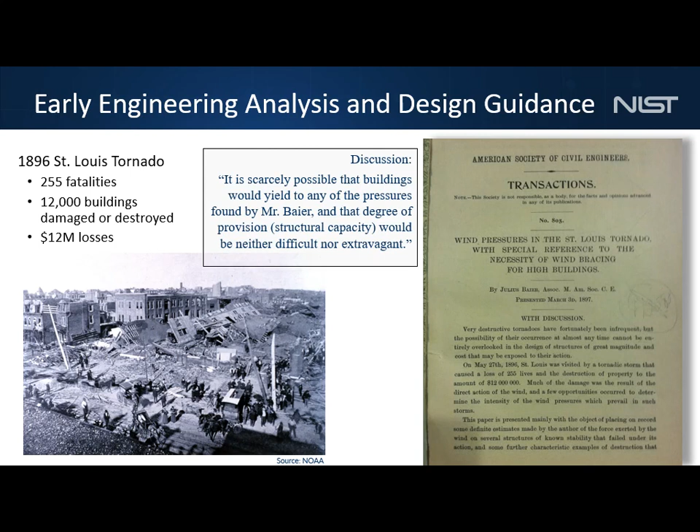We'll find out the same way: really, once you get above 3 or 4 stories, with the structural loads, we're not going to see collapses of those—we're going to lose cladding and things like that. But by the time you have a robust enough structure that's already going to be several stories tall, you've got the bones there that you need to be able to resist a tornado.

So how rare are tornadoes? The first chart we look at goes back to 1950 with our official records. We see, oh my gosh, what's that, climate change or something? We've got a few tornadoes in the early years, and later on, no—we didn't start out recording those tornadoes. The early years of the database were built by looking at newspaper records and other local records, etc. We didn't have that, and we didn't start recording tornadoes as a scientific field of study until much later.

Only when we get to the early 90s did we start to install the Doppler radar network across the U.S. Once we get past the early 90s, we can see that the number of tornadoes—there's a lot of year-to-year variability, but the number is relatively constant on average, something like 1,250. That's the number of reported tornadoes per year.

A large number of tornadoes go unreported, because where do you get reports from? The radars themselves typically don't catch the tornado. They might catch a rotation that indicates a possible tornado if it's close enough and on the ground, but unless the tornado happens to go right over the radar station or within a couple miles, it's not measuring any wind speeds or anything. So we have a possible indication, and until you go out and verify from the damage that you see, that's how a tornado gets reported.

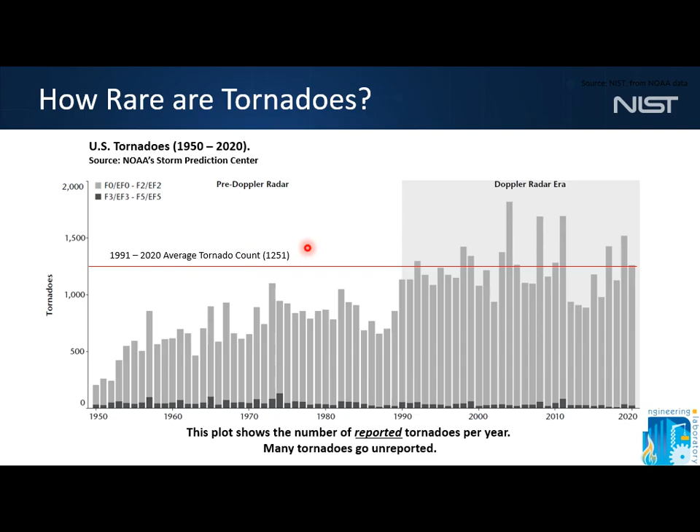Where did tornadoes occur? Tornadoes occur in all 50 states. They occur on all the continents—I don't know that there's been any recorded in Antarctica, but of course there's not much population down there to see them. The overwhelming majority occur east of the Rockies.

You might think, wait a minute, they don't get many tornadoes on the East Coast—sure we do. I'm in Maryland. We had one about a half mile from my house, an EF1, in June last year. We've had EF4s in Maryland and other intense ones.

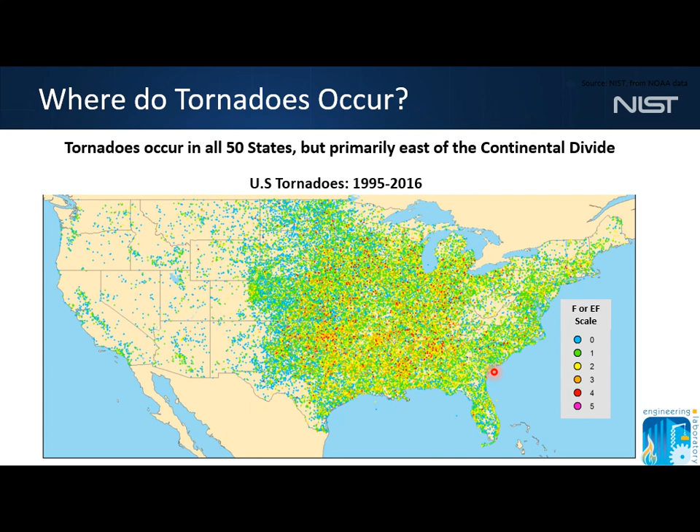We see more of the darker colors with the more intense tornadoes in the central U.S., over to the southeast, but we see some of these darker dots even over here in the east. We see a lot along the coast—hurricanes can spawn sometimes dozens, or a couple of dozen tornadoes off an individual hurricane, usually on the advancing right front quadrant, sometimes a state or two ahead of the hurricane.

If we think more about local impacts, as part of some work we were doing earlier, we went back mining a lot of different records over the last 30 or so years. These are just the schools we know about that have been verified as hit by tornadoes.

When you think about adopting your codes—with the 2018 IBC, did you keep the requirements for tornado shelters in schools? Does anybody require ICC 500 tornado shelters in schools? Nobody's raising their hand—I guess you might be one of the communities that amended that out. Some communities have amended out the storm shelter requirements. We put this work together to help communities understand their risk, so maybe when you adopt the later code, you should think about not doing that.

Some schools—we have one over here in Orrick, a school hit twice, and one over here in Gillespie, I can't quite read that. A couple of schools have been hit twice. How rare are tornadoes? A couple of the same schools just in these two states got hit twice in the last 30 years. Tornadoes are not really rare at all.

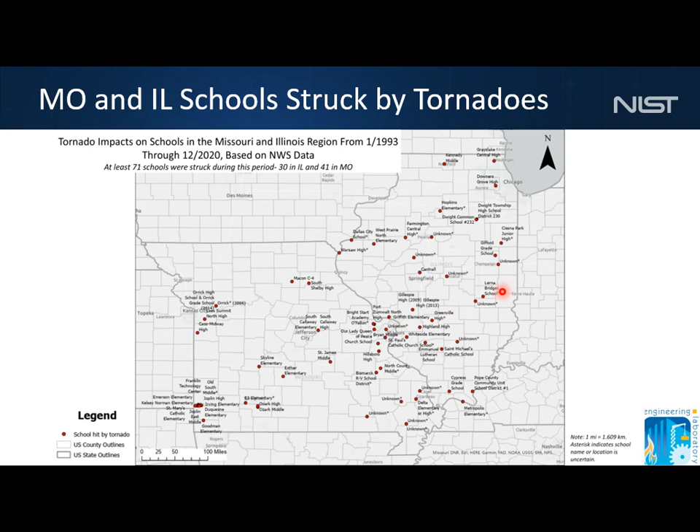How many lives are lost in tornadoes? Tornadoes kill more people per year in the U.S. than hurricanes and earthquakes combined. Tornado fatalities are a buildings problem—85% of all tornado fatalities occur inside of buildings.

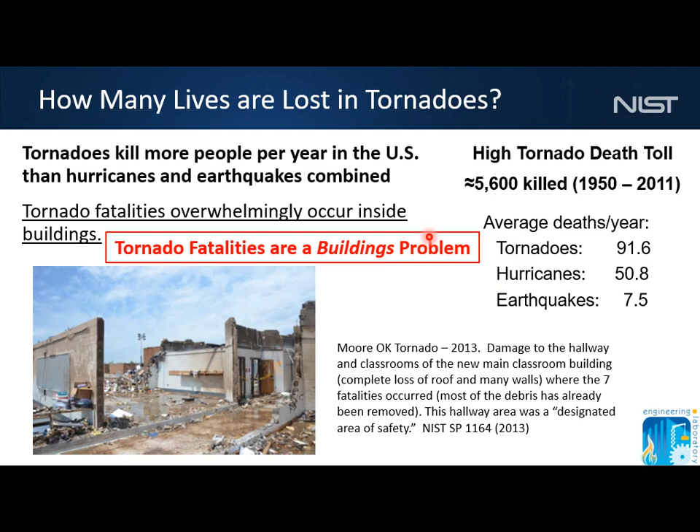We can design for Mother Nature's worst. Storm shelters provide life safety protection. FEMA uses the term safe room—their FEMA safe room requirements are nearly identical to ICC 500 storm shelters. In the center part of the country, like here, we're designing for 250 mile per hour winds, impact of a 15-pound 2x4 traveling at 100 miles per hour.

There have been no reported failures of ICC 500 storm shelters or FEMA safe rooms. This gets investigated—when there's a storm, FEMA has a huge database of all the shelters they've funded. They'll overlay that and look at any media reports of storm shelters or safe rooms that have been hit, and someone from our community will go out and investigate. We're proud to say a large number of residential safe rooms have been hit by even EF4s and 5s, and none have been significantly damaged with no injuries. There's also been a smaller number of community safe rooms and shelters hit.

How much damage do tornadoes cause? According to the Insurance Information Institute, catastrophe losses—events with over $25 million in covered losses—including tornadoes account for 40%. Hurricanes and tropical storms account for 38%. It's not a perfect statistic; the way they keep it, hail gets mixed in, so a lot of this is hail and other windstorms, but tornadoes are a big chunk of this percentage. Anyway, it's certain that tornadoes cause a huge percentage of our insured losses.

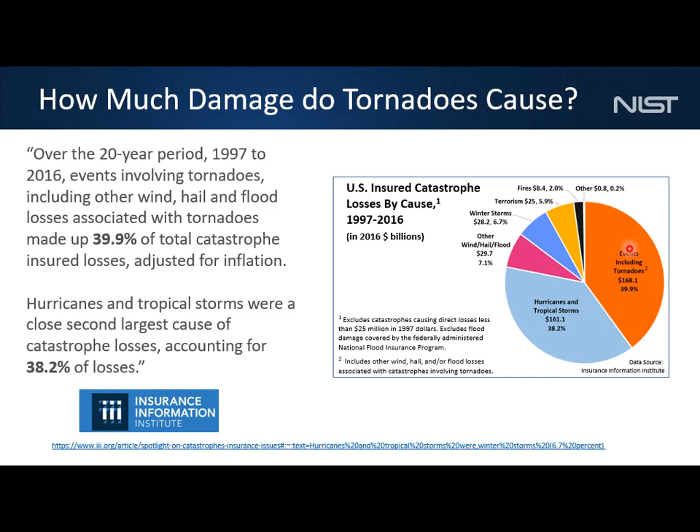The other thing that happens is a lot of the smaller tornadoes just aren't going to reach the 25 million threshold because it only hit 5, 8, or 20 buildings. So a bunch of the tornado data wouldn't be caught here because many smaller events don't qualify, whereas a hurricane or tropical storm making landfall, even a modest one, is going to exceed 25 million and be included. So there are a few different warts with this data, but that's what's available.

Isn't most of the damage caused by the big tornadoes? Let's take a minute to look at this plot. It's a little busy. First, look at the black line - this is the total loss, the average loss per tornado in millions of dollars, for EF0, our weakest tornadoes, up to EF5, our strongest. This is on a log scale, and we can see it goes up almost an order of magnitude with each increasing intensity.

But if we look at the total losses across all the EF0s, that's in red. Take all the EF1s in the database, all the EF2s - except EF0s, where wind speeds are down to 60 or 70, we're just ripping gutters off and getting trees falling. We shouldn't see major structural damage at the EF0 level, but once we get to EF1, we start to pick up that damage. So how do EF1s cause almost as much damage as 2s, 3s, and 4s? Well, that's because there are a couple hundred of these, versus less than one EF5 per year.

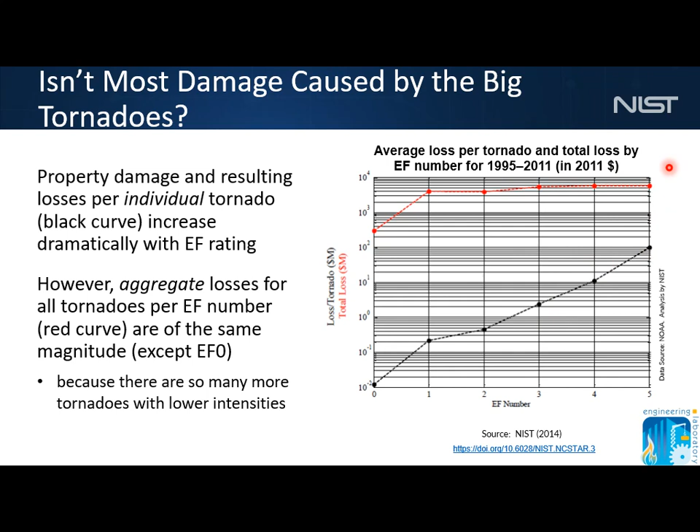We actually haven't had an EF5 in like a decade or so. That's what happens - yes, these are more intense, the intensity of damage is much greater, like the Joplin tornado, but these are much, much less frequent.

So here's our opportunity for tornado loss reduction. We don't have to design everything to withstand the most violent tornado - that's what people think. 'You have to design for tornado, I've got to design for the EF5.' Well, why? Do we design for a Category 5 hurricane hitting New York City?

No. We do design for Category 5 wind speeds in Miami, because that's more likely. Hurricanes go up the coast - we can get Hurricane Sandy, or Superstorm Sandy, in New York, but they're just less frequent. So the idea - there was a big hurdle to overcome to realize we could do the same thing for tornadoes. Let's design for the common tornado, the garden variety tornado, like we do everything else.

And it turns out there's a reliability basis for that. Violent tornadoes are uncommon - the vast majority are much smaller. We have EF0 and EF1, and here are the wind speeds: EF0 is 65 to 85, EF1 is 86 to 110. That 110 or so is around your design wind speeds here, depending on risk category - 110, 115, 120. So we can design for it.

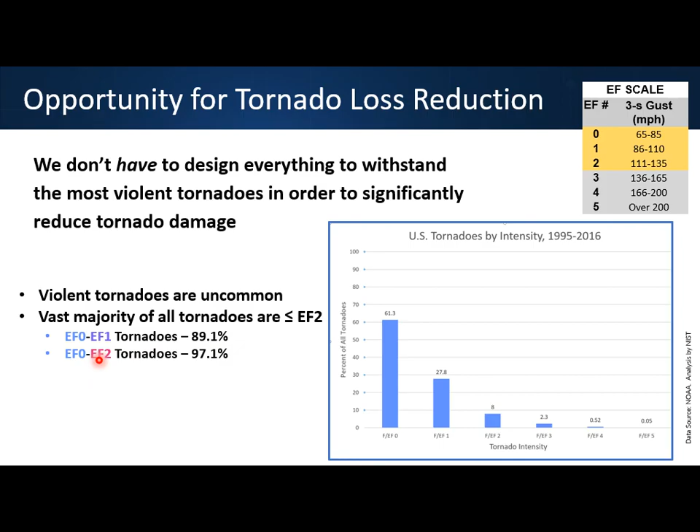It's not exactly equivalent - tornadoes, for the same wind speed, create higher loads for a few reasons we'll get into today. But these are things we design for all the time. In Florida we design for 200 miles per hour, South Louisiana we design for 200 miles per hour. There's certainly things we can design for. Most tornadoes - almost 90% are EF1 or below, even including EF2 or less at 135 or less - 97% of all tornadoes.

And not just that - even in those other charts I showed with the damage, this plot is from our analysis of the Joplin tornado. There are probably some smaller pockets of EF5 in here as well, but if we look at it, most of the wind swath of the whole tornado doesn't have EF3, 4, or 5 speeds, even if it's rated an EF3, 4, or 5 tornado. Those are small pockets with the highest wind speed - most of the swath is covered by EF0, 1, and 2 wind speeds. In this case, 72% of the whole track area impacted had EF0 through EF2 wind speeds. So we can design for a lot of parts of the tornado.

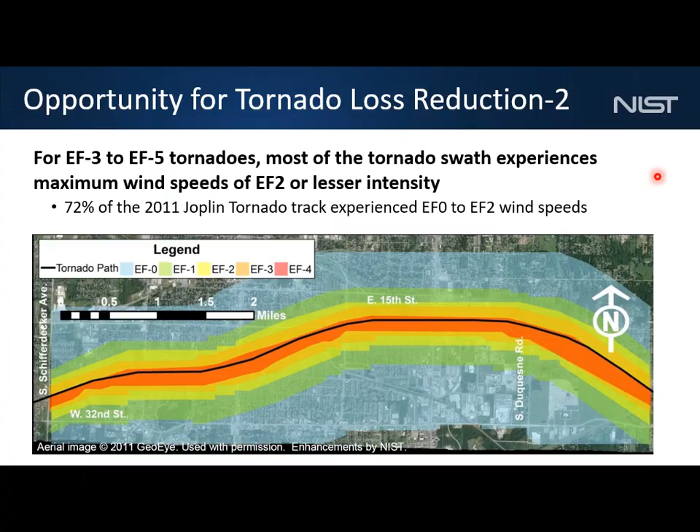So we need a paradigm shift here, ignoring the tornado hazards in design of our built environment is not an appropriate response. So the genesis of the tornado loads I'm going to talk to you about today was our NIST technical investigation of the Joplin tornado in 2011.

This was conducted under NIST's NCST authority, National Construction Safety Team. That authority was given to NIST after the World Trade Center disaster, when it was like, which agency has the authority to investigate this? The National Transportation Safety Board is called in if there's a plane crash or a train derailment, but there was nothing similar, so Congress created something similar, didn't give us any budget for it, but told us to go out and do that. NIST has a long history of doing disaster and failure studies, but that was a new additional authority they gave us.

Our study of the Joplin tornado was our first real tornado study. It was the most comprehensive study of a single tornado that's ever been done, including looking at the meteorology, the storm characteristics, the building performance, emergency communications, human behavior, and fatalities—all 161 fatalities. We know where they occurred, what the people were doing when they happened, cadaver reports, all sorts of things like that. From understanding all that, we developed a series of 16 recommendations for improving tornado hazard characterization, design and construction of buildings and shelters, and emergency communications.

When we conduct a technical investigation under NCST, we are on the hook to implement the recommendations. We have to write to Congress every single year about what work we did to get these recommendations implemented. From the World Trade Center disaster, we finished our implementation last year with the publication through ASCE of a new standard to prevent progressive collapse, disproportionate collapse. So some of these things, we might have to do a lot of R&D first, then we have to work with the standards and codes communities, et cetera.

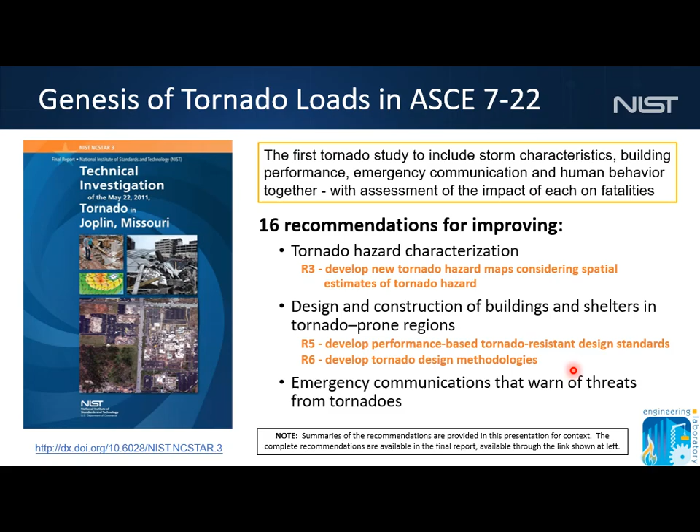So one of the things we're really going to focus on today is development of tornado hazard maps, development of tornado design methodologies, and performance-based tornado-resistant design standards.

One of the key things we need to understand that's different about tornadoes than just about every other hazard is the size of the building you're dealing with is critically important to your risk. I don't care how many square feet the building is, I care about the plan aspect area—what's the footprint of the building, and to some extent the shape. So tornado risk is a function of the building facility size and shape.

Tornado strike probabilities increase with increasing plan area of the building or structure—or maybe we call it a target. What that also means is if you fix the return period—50 years, 100 years, 1,000 years, 10,000 years, whatever you're looking at—for a fixed return period, the wind speed you have to design for increases very significantly with the target size. Think about it: is a tornado more likely to hit any one little house, or a warehouse that has 100,000 or half a million square feet? The tornado in some places was almost a mile wide, but it's much more likely to hit a really big target than a small target.

We talk about the development of our tornado hazard maps—these are in our ASCE 7 standard. For risk category 3, it's 1,700 years, the same return period we use for straight line winds. If we have a small facility, 10,000 square foot plan area, the tornado speeds we have to design for are pretty modest and don't cover much of the country. If we go up to a 1,000,000 square foot facility, we're going to cover almost everything except New England, and most everything except the West Coast and west of the Rockies, with some pretty significant speeds, especially in the middle of the country.

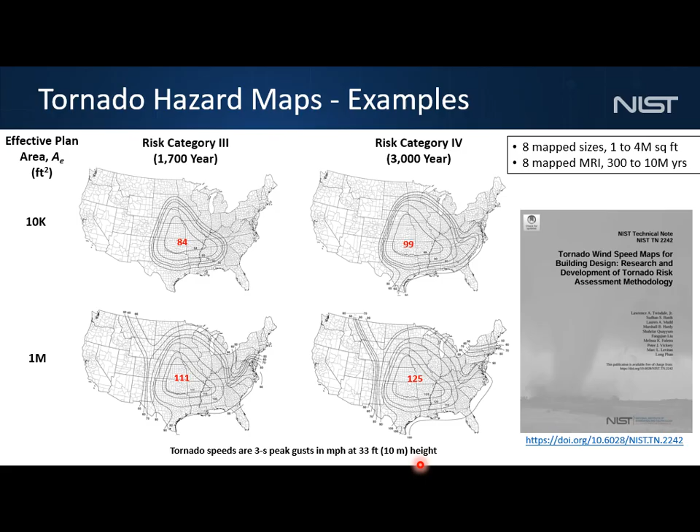Our facilities are 40 million square feet for LNG facilities, so they can go up to that size, some of these big facilities on the coast. That's something we're hoping to produce larger maps for. We have short return periods all the way up to, again, what the Nuclear Regulatory Commission was interested in: very long return periods, 10 to the 6th, 10 to the 7th kind of things.

One of the really important things, and a lot of the new research we did, is that all of the tornado load provisions are based on a decade of research, much of it conducted by NIST, but also gleaned from the literature and other researchers and collaborators.

The key thing is tornadic winds are very different from straight line winds. We have a different climatology, which we talked about with the maps. They're very short duration, with rapidly changing speeds and directions. They have strong updrafts right near the ground, and a decreasing speed with height above the ground instead of increasing speed, so the profile is totally different. We also have to worry about atmospheric pressure change, and much more intense windborne debris.

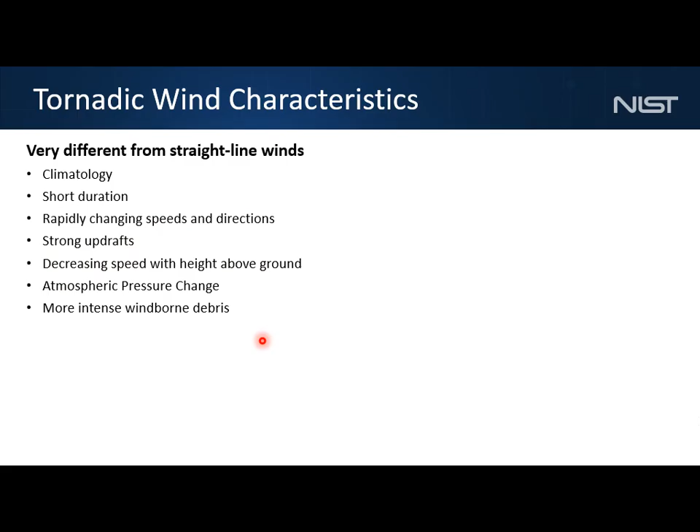Just as an example, we don't have time to go through all the research, but for this one in particular, to look at the velocity profiles of the horizontal winds, we worked closely with the mobile radar community, the Doppler on Wheels, the real chasers, the science chasers, not the tourist chasers.

Out of all the hundreds of records they've collected over the past few decades, they had a few dozen tornadoes where they measured wind speeds near the ground, usually limited by curvature of the earth, elevation beam angle requirements, distance away from the tornado, etc. Usually, even when measuring the tornado, they're up a thousand or thousands of feet in the air.

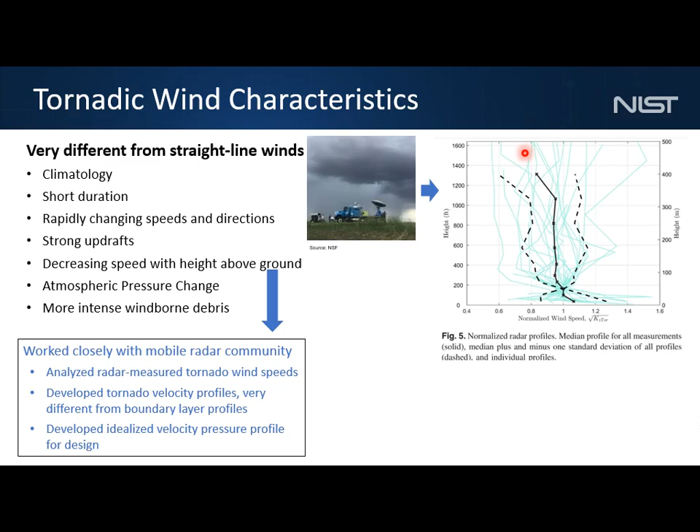But there are very few records with data near the ground, and there's a ton of scatter here. This is like a normalized velocity profile versus height, our normalized wind speed, and we see there's a lot of scatter. But if we look at the median profile, it looks pretty uniform, and actually increases a little bit near the ground. That's what this dark line in the middle is, the median profile.

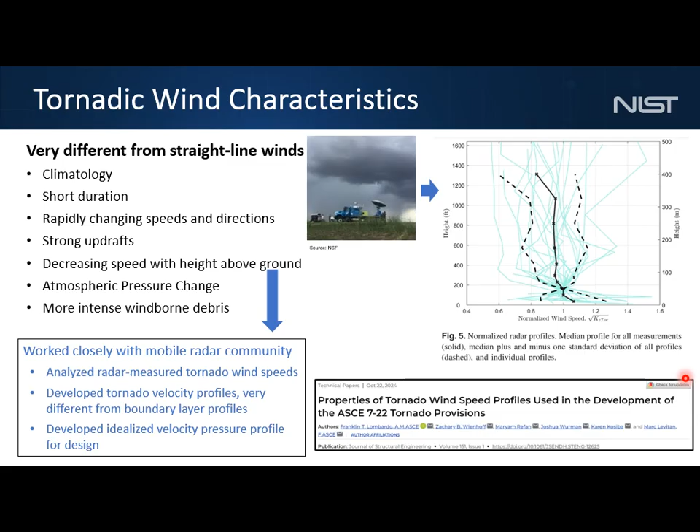What happens is the air rushes in, right? It's this vortex. The air rushes in along the ground surface, turns the corner in what they call the corner flow region, and then moves up. So the highest horizontal wind speeds occur near the ground where the air is getting sucked in, totally different from our boundary layer wind. We recently published a paper on that development with some colleagues in the ASCE Structures Journal.

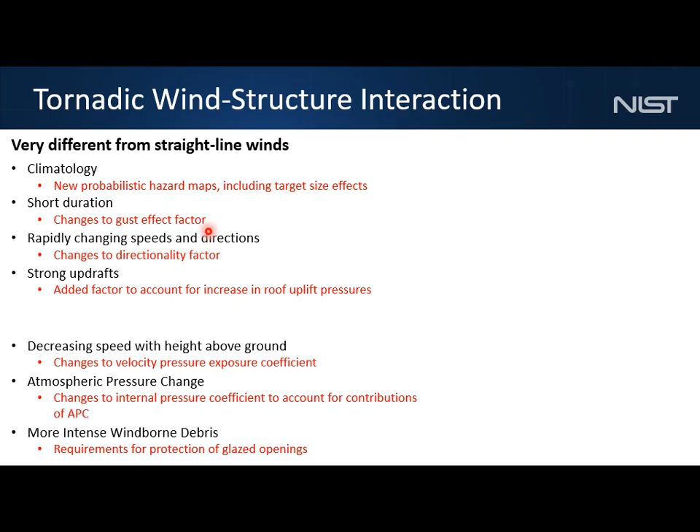So for all these different types of wind and characteristics, we had to make changes to our wind load design procedure. We have new probabilistic hazard maps, which we talked about. We made some changes to the gust effect factor, which we don't understand nearly as well as we should. And we made some changes to the directionality factor for the strong updrafts.

The tornado simulator testing wasn't as good as it is now, and we had to do this work 7 or 8 years ago at this point. We used a boundary layer wind tunnel, but we tipped the back of the model into the floor of the wind tunnel to simulate an increased angle of attack and a net updraft on the roof, which enhances our roof uplift coefficient.

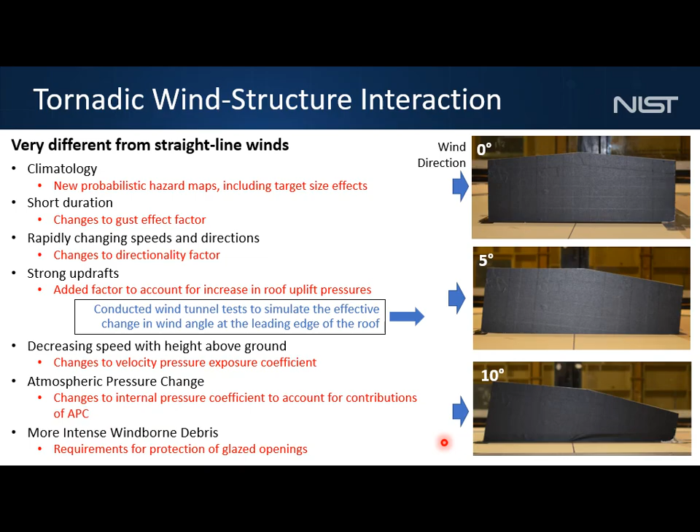Changes to our velocity pressure: we have atmospheric pressure change to worry about, and we have a more intense debris environment because of these updrafts, etc. It's much more intense than even a hurricane.

This kind of construction, this tall wall—whether it's precast, reinforced masonry, etc., with bar joists up on the roof—that connection, that roof is typically the only thing holding that wall up. There's not enough bracing laterally between the walls or foundation; they're not designed to be cantilevered. As soon as that roof starts to come up a little bit, you lose that top of the wall, and that wall's unstable now.

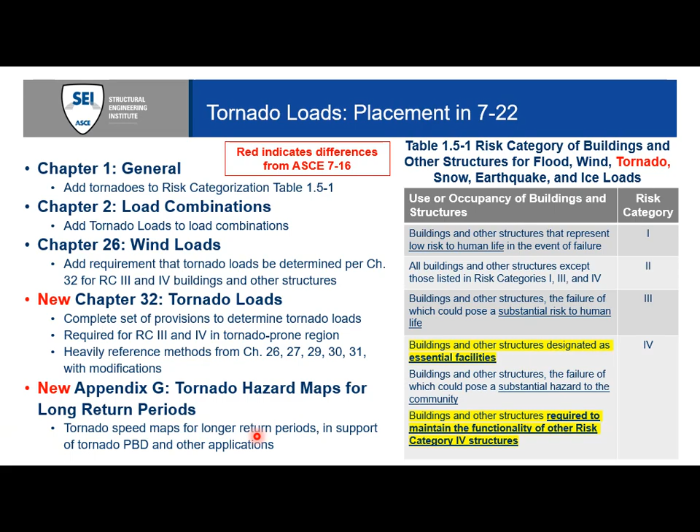We've made some changes to load combinations. We had very limited changes to wind loads, pretty much just removing the limitation that says don't do tornado. We have a brand new Chapter 32 on tornado loads, and a brand new appendix with long return period hazard maps for tornado loads, particularly for NRC and other users interested in much longer return periods.

As a reminder of our definition of essential facilities: these are buildings and structures intended to remain operational in the event of extreme environmental loading from flood, wind—we added tornado to that list. There's a bunch of other places in Chapter 1 where they listed a bunch of hazards, and tornadoes is now included on that list.

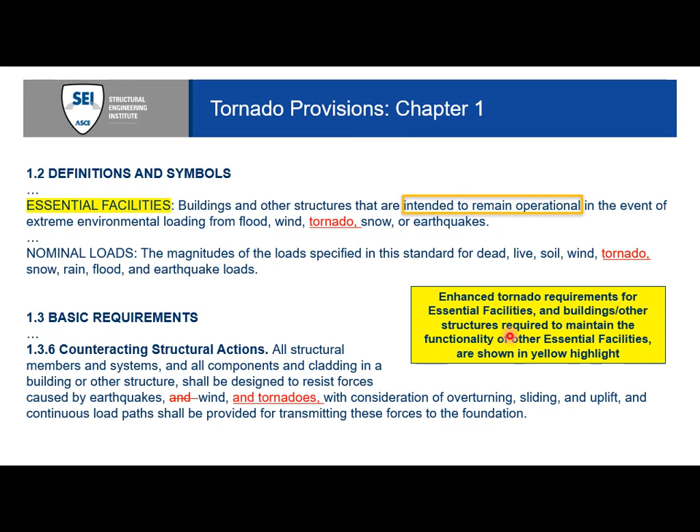A few other places in the presentation here I'm going to highlight. For essential facilities, we have some enhanced requirements for buildings to hopefully help maintain this functionality requirement.

In our load combinations, we had W used for wind load, we added W sub T for tornado load, determined in accordance with chapter 32. Tornado loads are not treated as a subset of wind, right? We have a chapter on flood loads, a chapter on tsunami. It's both water around the building, right? But they're very different. The nature of the hazards are different, those sorts of things. So we treat tornado loads totally separate.

However, when we go into the equations, in equation 4, the equations that deal with maximizing wind load, now we're going to substitute a W or a W sub T. So you have to calculate your tornado loads, you calculate your wind loads. When you go into the load combinations, then you see for each individual element that you're designing which one's controlled. If you remember, combinations 1 through 4 maximize our gravity loads, combination 5 maximizes uplift.

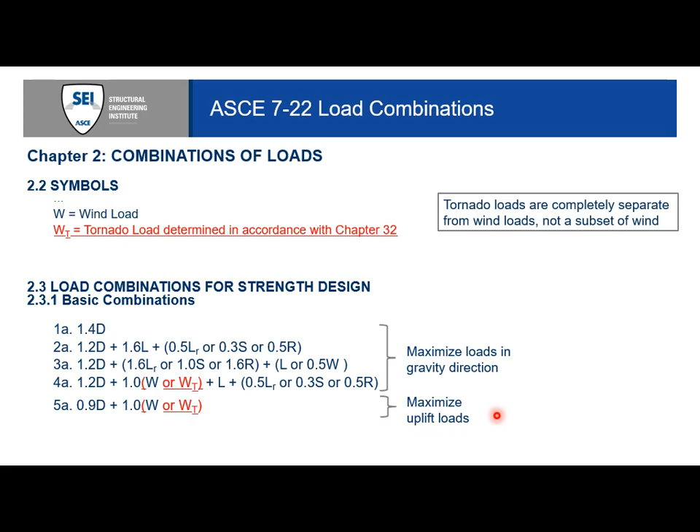So tornadoes are separate. Now notice here, on equation 3, we have a live load or 0.5 wind. Why isn't there a wind or tornado there? Well, because equation 3, we're maximizing something happening on the roof, right? Roof live or snow or rain. And this is our arbitrary point in time load. We don't have an arbitrary point in time tornado. I mean, it might be windy and there might be a little bit of wind blowing, so you might have a wind load, but you wouldn't have a W sub T there.

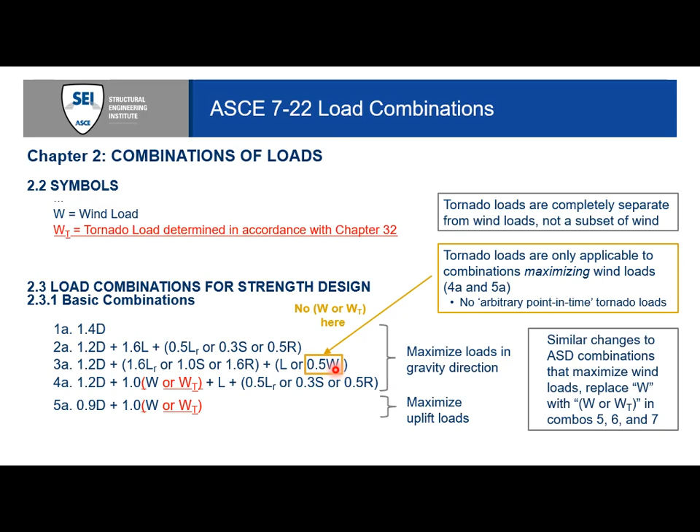And similar changes in the ASD combinations. We won't show those here for sake of time.

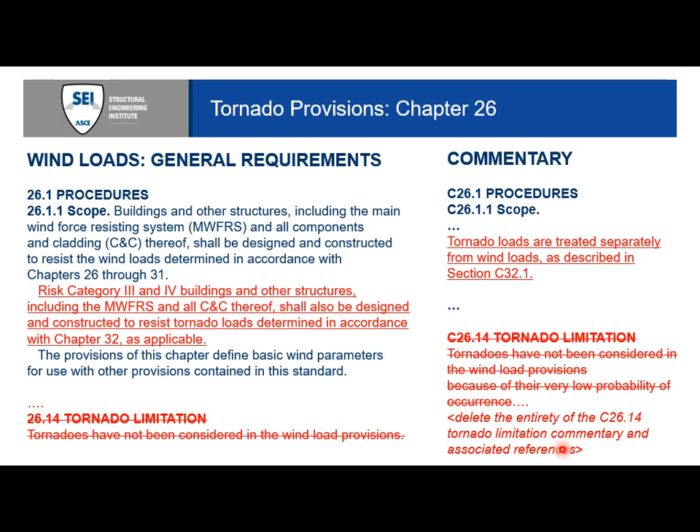In chapter 26, we just added one sentence to the scope of the chapter. Risk category 3 and 4 buildings and structures, including main wind force and components and cladding, shall be designed and constructed to resist tornado loads per chapter 32. And we just point in the commentary to chapter 32, and we've removed this whole section, half a dozen pages of commentary that we have on the tornado limitation.

Our chapter 32, we look at our scope. It starts out with a flow chart. And particularly the seismic folks on ASCE 7 fussed at us about this. Oh my gosh, wind's already complicated. Really, the seismic people complain about wind load being complicated. Here you've got to worry about both of those aspects. But they're saying, well, can't you give us some ideas when we don't have to do tornado loads? And so we came through and there's this flow chart. Tornado loads required: well, if it's not risk category 3 and 4, nope, you don't have to do it.

Are you in the tornado prone region? If you're not in the tornado prone region - what we showed on the map is basically east of the Rockies - nope, you don't have to design for tornadoes.

Then we looked at, is your tornado speed greater than 60? You get your tornado speed from the map. If you're less than 60, you can stop right there. Tornado load won't control. In our regular design wind speeds, even at the lowest ends, any place here they're 100, 110, whatever, by the time you get to risk category 3 and 4. And if the wind speed of the tornado is less than 60, just with our calculation procedures, it generally won't control anymore.

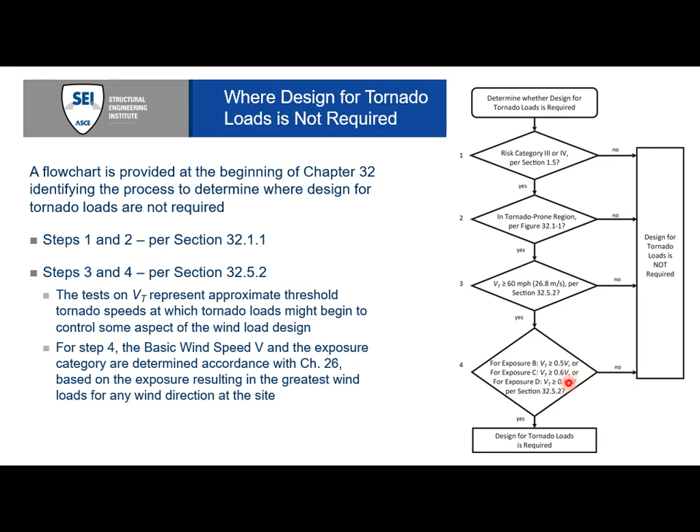Or if for different exposures your tornado speed V sub T is greater than some percentage of your basic wind speed. Now, as we'll see, we don't understand about surface roughness and exposure effects for tornadoes, but obviously it reduces your wind load. If you're in exposure B, you get 30% less wind load probably than in exposure C, depending on the height of your building. And so this is kind of how likely a tornado is to control over your wind speed. Well, if your tornado speed isn't greater than either half or 60% of your wind speed from B or C most of the time, then you can just stop right there. You don't have to do tornado.

One of the key things that we put in the tornado load chapter is this really big user note, like a caution that kind of says, wait a minute, this is brand new, folks. You need to understand some things. We have some pointers to commentary. Importantly, let me highlight some key elements here: the tornado loads specified in this chapter provide reasonable consistency with the reliability delivered by chapters 26 and 27, for regular main wind loads.

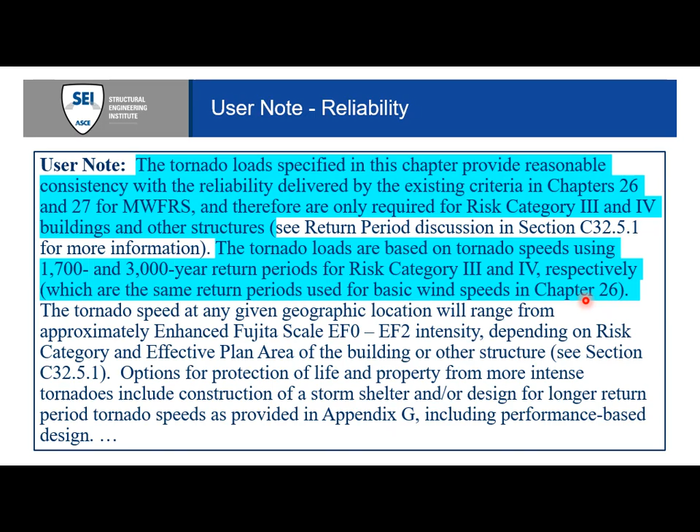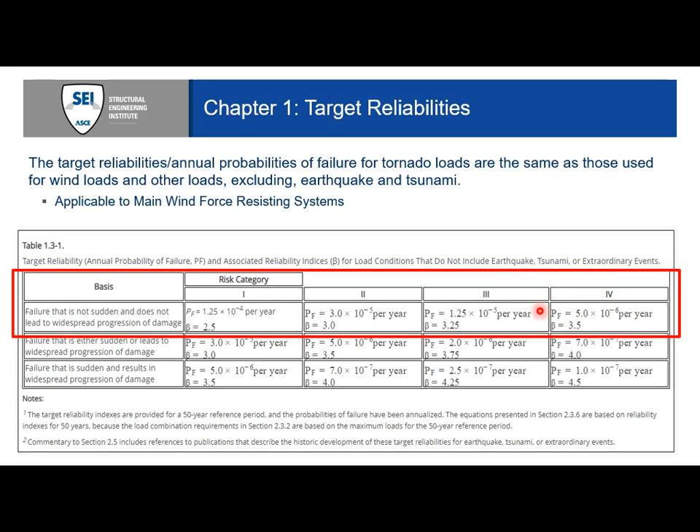They're only required for risk category 3 and 4 structures. The tornado loads are based on tornado speeds using the same return periods we use now. We have target reliabilities in chapter 1, and those target reliabilities for risk category 3 and 4 are the same for tornado as they are for straight line wind. So your probability of failure over the life of the building should be the same for risk category 3 and 4 as for the regular case. So what that means is we're designing for the garden variety tornado, not the most intense.

This work was a collaboration between NIST, Applied Research Associates, the ASCE 7 Load Combination Subcommittee, and the Wind Load Subcommittee. We adapted the reliability analysis used for the ASCE 7-16 maps for these new tornado load provisions.

We conducted a series of risk-informed analyses to compare the proposed wind load criteria and tornado load criteria. Our key finding was that tornado load criteria provide reasonable consistency with the reliability delivered in chapters 26 and 27. Bottom line: for risk category 1 and 2, at 300 and 700 years, tornadoes are infrequent enough that the tornado speeds are generally low enough that tornado wouldn't control. By the time we get to 1700 and 3000 years for risk category 3 to 4, tornadoes very well can control, especially in this part of the country. So we use the same return period.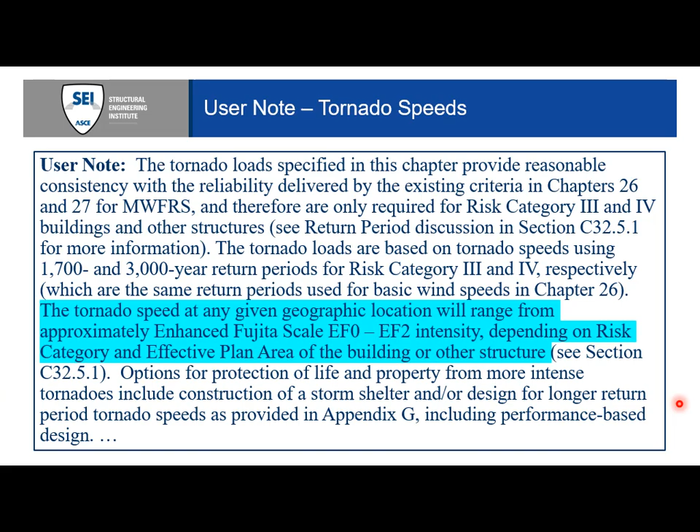An important outcome is that the tornado speed at any geographic location will range from approximately EF0 to EF2 intensity, depending on the risk category, the effective plan area of the structure, and the geographic location. Options for protection of life and property for more intense tornadoes include storm shelters and/or design for a longer return period, or performance-based design.

Again, we can design, we should design. Hopefully you'll advocate with your local codes and city councils, etc., to adopt the 2024 building code. And if it's already amended out, don't amend out section 423 requiring storm shelters in schools, fire stations, police stations, and other emergency response facilities.

So, tornado shelters — one of the key warnings in this commentary block is you can't design a tornado shelter just because we have a tornado load chapter. No, the tornadoes we're designing for are garden variety, the common tornadoes that meet the current reliability.

This is the map from ICC 500 that you have to design to. You're designing for 250 miles per hour in this whole big area of the country, for a 15-pound 2x4 instead of a 9-pound 2x4 at 34 miles per hour, etc. There's a whole raft of other requirements. If you're going to design a tornado shelter, go to the ICC 500 standard.

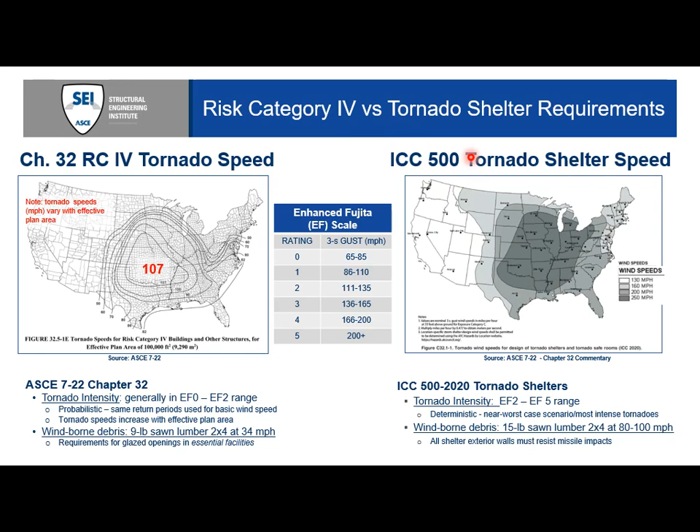Our tornado load procedure, if you're familiar with the wind load procedure, is very similar. We started with the wind load procedure and tried to keep the terminology, nomenclature, and overall procedure just about the same. Most of the things have been modified, most variables are slightly different, but if you can do the wind load, you'll be familiar enough to pick up the tornado loads.

We reference all the other wind load chapters except chapter 28, which was our envelope procedure commonly used by the metal buildings industry. The approach taken to develop the chapter 28 wind loads was incompatible with how we had data available for chapter 27. It's likely chapter 28 is going away in the next edition of ASCE 7, and chapter 27 will have major revisions. There's a $500,000 study recently wrapped up at Western Ontario doing much more wind tunnel testing of a much larger range of building shapes, so we'll have one single method that's more effective and reliable than having two different methods in chapters 27 and 28 that can give very different main wind force loads.

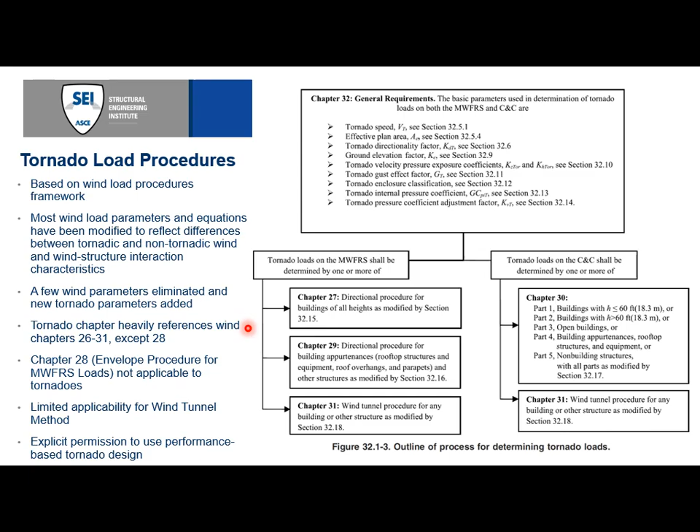In terms of our terminology, for example, if we have a gust effect factor that used to be G, we're going to give it a subscript with a capital T. So pretty much it's got a capital T on there at the end. That means it's a tornado version. There's a few little odd things, like we already had a KZT for topographic features, so we made some slight adjustments there. But pretty much, we just added a subscript capital T, and that becomes a tornado.

So our tornado velocity pressure, here's the differences from the equation that you're used to seeing. We have our Q, our velocity pressure, right? That's half, and by the way, it's not some magic, it's half rho v squared. Remember your fluid mechanics from undergraduate, half times the density times the velocity squared. The 0.00256 is just half rho in units conversion, so you can put stuff in miles per hour and get it out in PSF. And so instead of having a KZT, a topographic factor, times a KD, times the elevation, directionality factor, times the elevation factor, times the velocity, we have a tornado KZ factor, a KZ tor here.

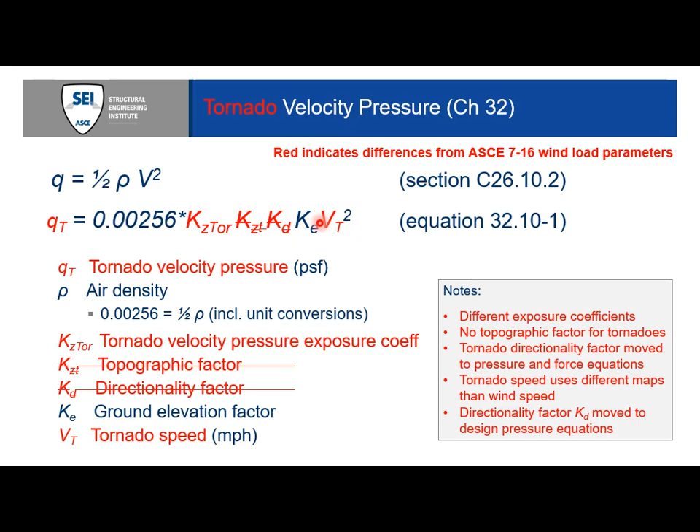We've moved, actually, even for the straight line wind in ASCE 7-22, we got rid of the KD and we moved it to the pressure equation. Because KD wasn't really just only a function of the climatology. It has to do with the different building shape, right? You have a round building, you get a KD of 1, right? And you get different, so it has to do with the building as well as the wind climate. So that's got moved out. Elevation factor and a tornado. So it's a similar equation, but some things, parameters have been replaced.

If we look at our tornado velocity pressure equation, remember I showed you the wind speeds are faster near the ground and they decrease aloft. So that's totally opposite from our exposure B and our exposure C, where we know that the wind speed increases with height above ground. If you like to sail, if you like to fly kites, all those things, you got to get above the ground to get the higher wind speed.

So our KZ and our KZ tor, we have a higher one, so it's a value of 1. So what you can tell right there, if I've got a low-rise building, only 1 story or 2 stories, I'm going to pay a price with that, and I'm going to have some higher loads because of this KZ factor. But once I get to a medium or tall building, wow, the factor is so much less here. Tornado loads will not control tall building design. We've only seen maybe a dozen or so strikes of tornadoes over the years on tall buildings. It takes the cladding off, and it doesn't... we don't see significant damage.

Those buildings are, and partly because the winds aloft are significantly reduced, the one part of tall building design that would be controlled by tornado is the cladding, particularly at the lower elevations, might be controlled. And if it's somehow an essential facility or the building is designed to be operational, then perhaps the cladding loads over the whole building. Well, the one thing is, hey, that's easier, right?

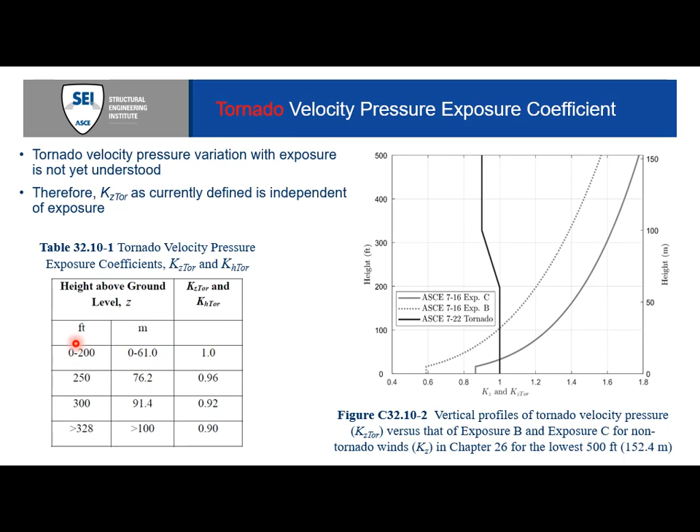I don't have to worry about trying to figure out what exposure I'm in and get the aerial maps and look at that and there's exposure B or exposure C or something. Hey, it's just one exposure. It's one undefined exposure. And my building's less than 200 feet, which almost all buildings are. My KZ is just 1. That's easy.

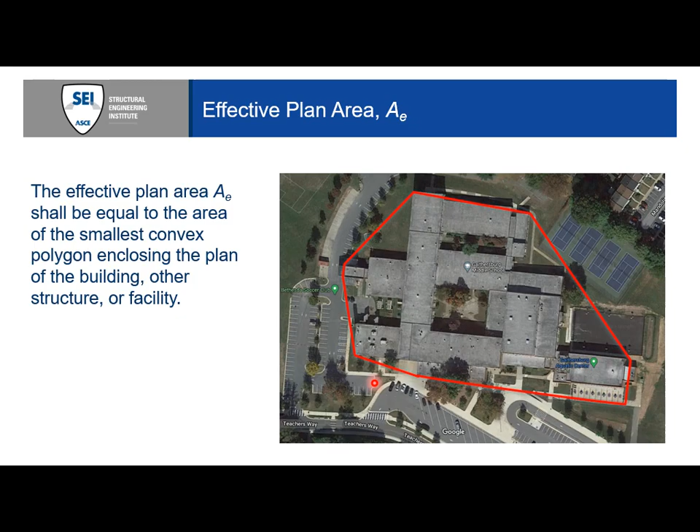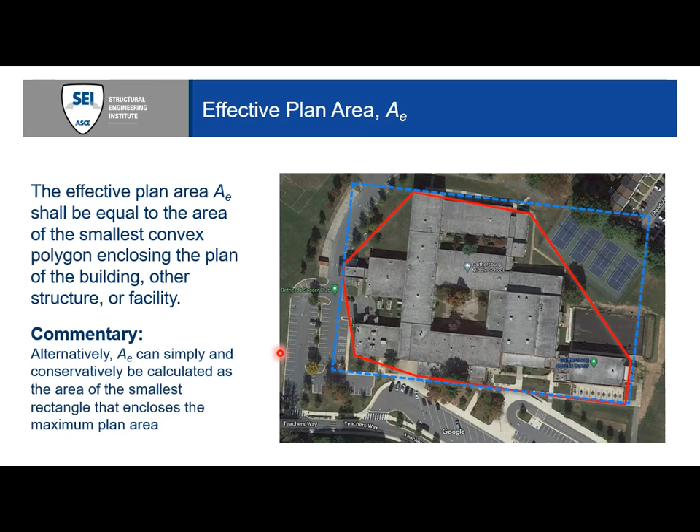The next thing is, I talked to you about the size of the building is really important. So how we define the size of the building is called not the plan area, not the footprint area, but the effective plan area, where we take a building. Here's a middle school near my house. I'm going to draw the smallest convex polygon that encloses the building of interest. Okay? And if I don't want to bother with that, I can just put a rectangle around it. It's not that sensitive to a small change like that, a 20 or 30% increase. It might be 1 or 2 miles per hour, et cetera. But that's going to be my effective plan area that I'm going to use for that building.

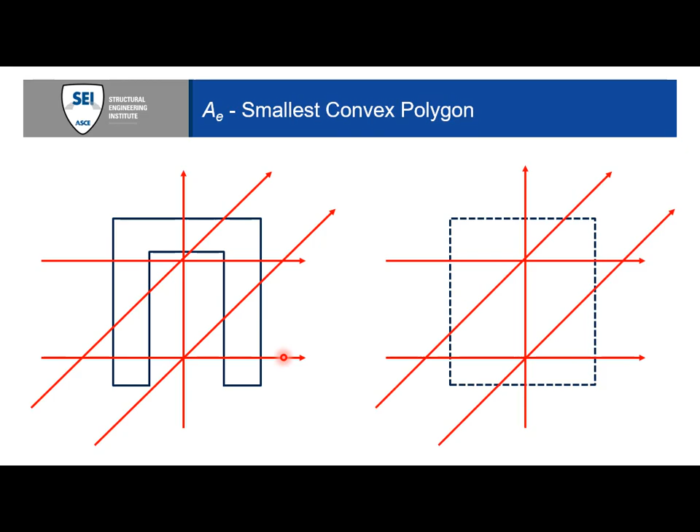That's the same as if I draw this convex polygon around my U-shaped building. All those tornado tracks do the same thing, right? So the likelihood of the building getting hit is the same either way. That's why we draw this convex polygon.

More importantly, what if I've got an essential facility, and I've got the hospital here and the physical plant here? That hospital cannot operate without the physical plant. It's got the chilled water, the cooling, the medical gases, the backup generators—it's got all the stuff that's needed to run the hospital.

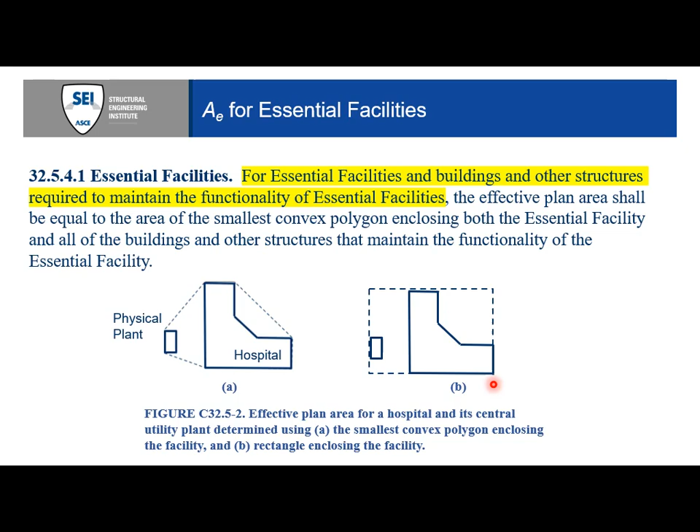So you have to draw the smallest convex polygon around all the buildings that are relevant. You've got the surgery center up here, so you're going to have to loop in the surgery center and bring that around—or again, you can just put a rectangle around it if you want. It's not super sensitive, it won't make that much difference.

So how do you get your tornado wind speeds? There are paper maps in the ASCE 7 standard, but along with publication of ASCE 7-22, there's the hazard tool—just Google ASCE 7 hazard tool. That's free online. If you're not using it yet, oh boy, that's so easy.

You can get all your different loads—ground motions, ground snow load, all that kind of stuff. You just put in which version of ASCE 7 you want, because it's free. It goes all the way back to ASCE 7-10.

And you put in your geographic location, or put a dot on the map, or put in the coordinates, or put in the street address. It'll locate it for you, and you can print out a whole report with all your hazards in it.

For a tornado, here for this particular location—some place in Oklahoma—we can see I've got a wind value given right here. For a tornado, I've got a lot of rows here, and it gives me a whole table.

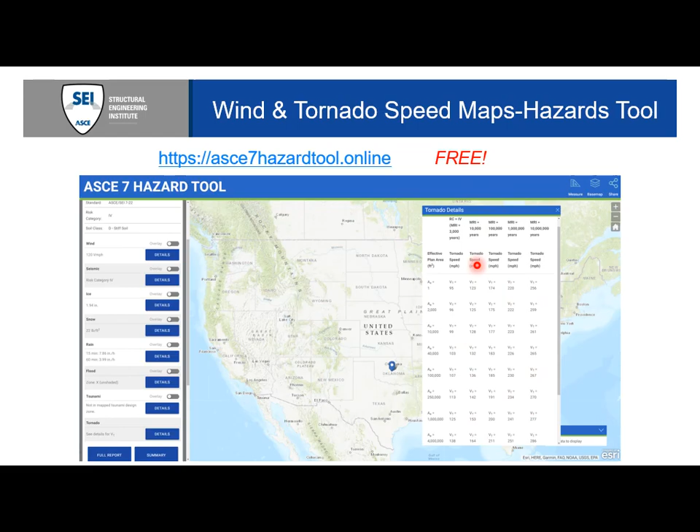So if I'm doing an energy facility or a nuclear facility or something, I've got that. Going back 10,000 years—some energy facilities use 10,000 years. DOT, LNG, and other kinds of things use 10,000.

Use that for our tornado load equations. Again, all the things in red are different from what you're used to dealing with—somewhat different, not that different. So our pressure for our main wind force and for our components and cladding is our tornado pressure.

We have our velocity pressure, QT. We're going to have our gust effect factor, GT. Again, we said we moved the directionality factor, KD, into this equation. And then we also have a brand new factor called KVT, which accounts for the differences in tornadoes, like the vertical updrafts and things.

And then we also see the KD is moved out here for tornado, because for internal pressure—and we'll talk about that in a minute—internal pressure is the atmospheric pressure component. That's normally like, hey, I've got an open window, the wind's coming in, I get some opening effect, some internal pressure in the building, or even if I just have background leakage.

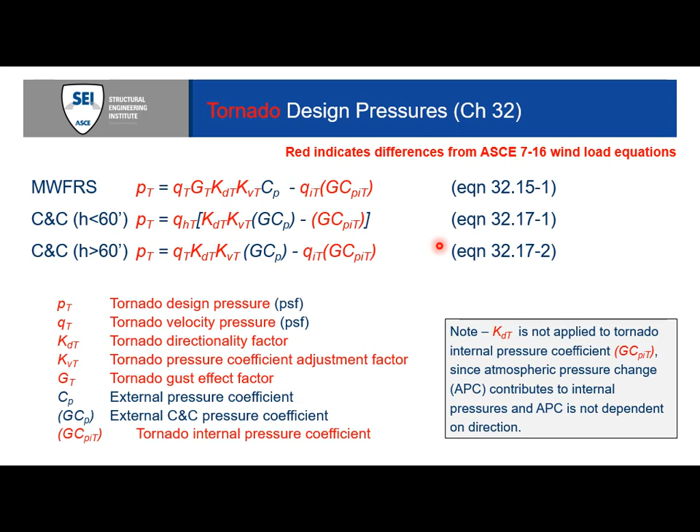That is dependent on wind direction, but atmospheric pressure change isn't. So since that's a component that can dominate sometimes, we don't get a directionality factor reduction on the internal pressure. So there's another difference: we have a different KD, and the KD only applies to the external coefficient, not the internal.

Our KD value—for most buildings we're just using 0.85 for wind. And like I said, there's a few odd things in there, like circular buildings and stuff, that have numbers closer to 1, et cetera. Our KD for main wind force is 0.8.

Again, we have these more rapidly changing directions, and sometimes the building is such that it's smaller than the tornado—when the tornado is smaller than the building, you get less correlation and things like that. So we see a little bit less, 0.8. And most of our components and cladding is only 0.75, except in the middle of the roof, which is our 1 prime zone.

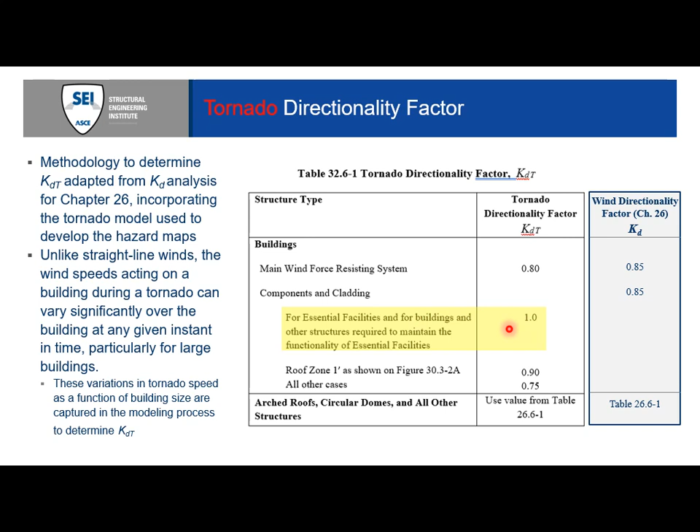One of the other things that's different here is our KD factor for components and cladding for essential facilities. We need to keep all the cladding on the building, not just lose a few pieces. We're going to keep the building operational. So our KD is 1 for essential facilities. We also have debris considerations for essential facilities.

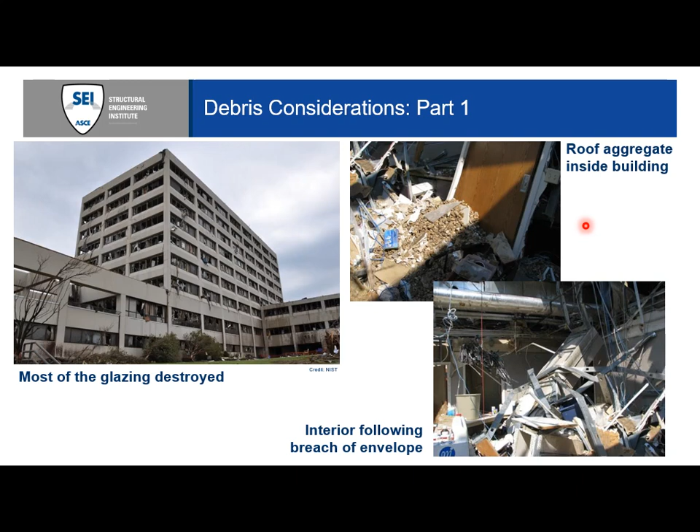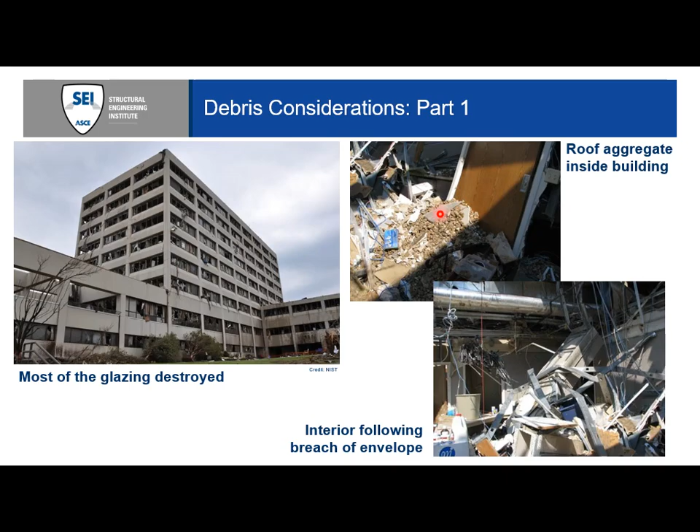Here's a bunch of roof gravel. Thanks to folks here in Missouri, the Structural Engineers Association, I think SEAKM is the acronym, who helped us with pictures and data from inside here when we wrote our Joplin report. Here's a whole bunch of roof gravel off their own roof, breaking out a lot of their own glass.

But on the 5th floor, all the glass everywhere on this whole facility was gone except for the 5th floor, which was the behavioral health unit, the psych ward. The psych ward had impact protected glass for patient safety reasons. Even in this horrible environment with huge debris flying around, that glass survived. So we have requirements. If we build, we have the technology. Could you have individual panes break out due to a bigger piece? Sure. But in general, we can see we can survive with our current technology.

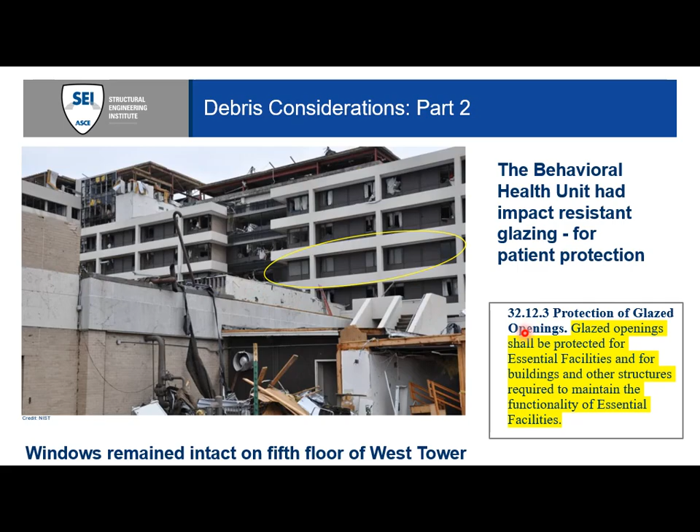So we have glazed opening requirements for buildings that are intended to remain operational. Realistically, if you're designing for tornado, you don't want your building to look like this. So you're best off just putting in impact glazing.

We do have atmospheric pressure change. Those of you with even a little more gray hair than me might remember the Weather Service used to say open the windows in your house to equalize the pressure so it doesn't explode. Well, the house doesn't really explode due to atmospheric pressure change. There's internal pressure, right? We know air gets in, and maybe you break a window and get more internal pressure, but we already have plenty of leakage.

We know we pay the electric bill or the heating bill. There's vents for makeup air and plumbing, gaps underneath the door and around windows. So there's opportunity for pressure to equalize. But as buildings get larger and tighter with energy efficiency, APC does have a component.

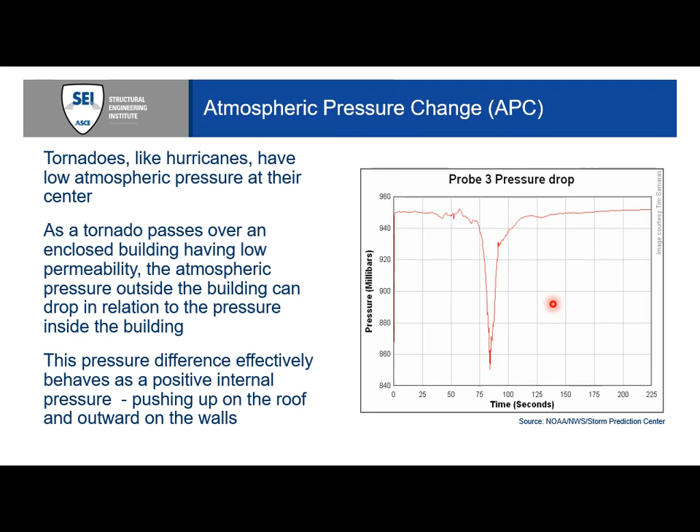It's not as simple as how we're explaining it, but we've added the APC component to the internal pressure coefficient. So we've made a couple of changes to our internal pressure coefficient.

One, we've added a sealed other structures category, and I've heard a few people already taking this to think of a sealed building. This is not a sealed building, it's an other structure. This would only be applicable to things you're designing like tanks and vessels that you can truly seal, where you have a valve that's closed and there's no equalization at all of the pressure.

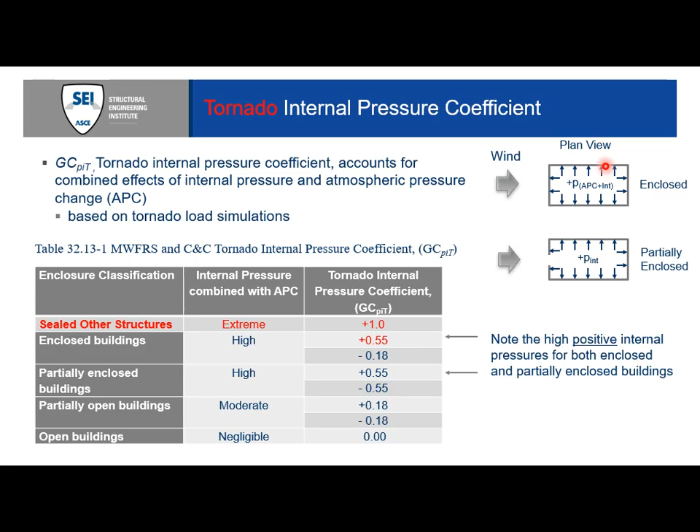But for enclosed buildings, we have a positive 0.55 and a minus 0.18, instead of a partially enclosed plus 0.55 and minus 0.55. That's because if the building stays relatively sealed, when the low pressure of the tornado is over the building, you have low pressure outside but still have what was the atmospheric pressure inside. Those two can't equalize that quickly, so you can have a contribution of the APC plus the positive internal pressure.

We have this new modifier, KVT, that accounts for the tornadic winds. This basically accounts for the enhanced updraft, causing uplift or negative pressure on the roofs. For main wind force, we have a 1.1, so a 10% increase. For components and cladding, depending on which zone and roof slope, it's anywhere from 5 to 30%.

This was based on boundary layer wind tunnel tests where we changed the orientation of the buildings to artificially create some updrafts. In tornado simulators from Texas Tech, from Missouri University of Science and Technology right here in your state, from University of Western Ontario, and multiple other tornado simulators, we're seeing the same thing.

These updrafts, and in ASCE 7-28, we're going to see probably some larger numbers with this larger updraft. You saw it in the video, right? The winds come along, they suck that roof off, et cetera. So we're going to see larger numbers probably. At the moment, we don't have it. We just use one value for downward acting pressures on the roof and for wall pressures. We also know we can have some higher concentrated wall pressures in tornadoes than we currently account for, so you can expect these numbers to go up in ASCE 7-28.

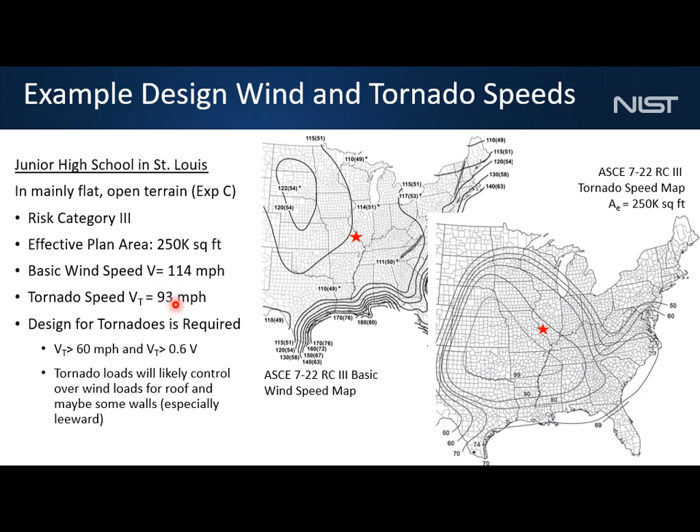What happens is the walls—the elements of the building that are more sensitive to changes in internal pressure—are affected, but base shear doesn't matter; if internal pressure goes up or down and I'm designing a foundation for base shear, it doesn't matter, those two things cancel out. But if I'm designing just the leeward wall or individual walls, those are going to be more sensitive to the internal pressure coefficient change. So with this difference of like 20-some miles per hour, tornado will control some but not all of the wind speeds or the pressures.

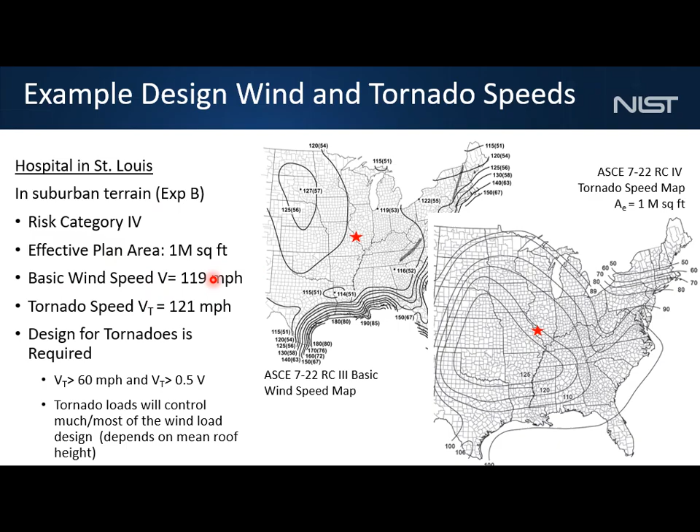And it gets kind of complicated here. If we've got this hospital in suburban St. Louis, and let's say that's exposure B, now my basic wind speed is going to be 119, and my tornado speed is 121. For sure, tornado is going to control most of your wind load.

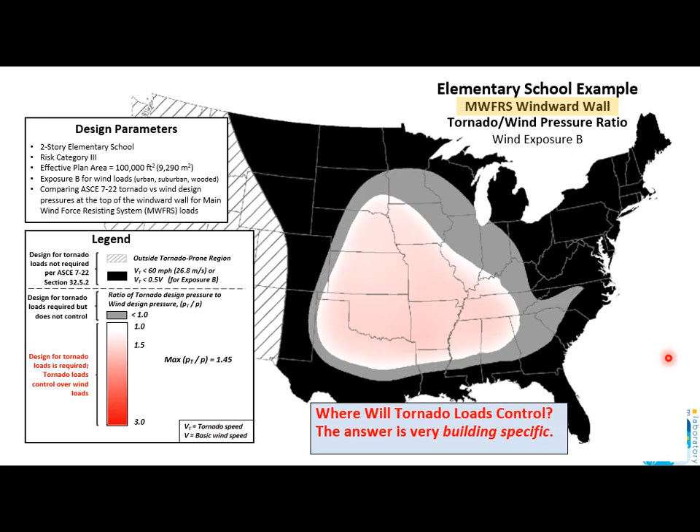It's very specific, not only to the building, the size, the location, but which component of the building you're dealing with. Because we have these different uplift factors, and different change in atmospheric pressure, it's not like you just take your wind load design and multiply it by some ratio to get a different set of pressures. The pattern of the pressures is different. You have a different shape, and it's not all the same. Some go up higher, some relatively faster than others.

If we look at the leeward roof uplifts, on the back side of the roof for the same elementary school, we see it's going to control in the larger part of the country, and here the ratio is about double the uplift on the leeward side of the roof.

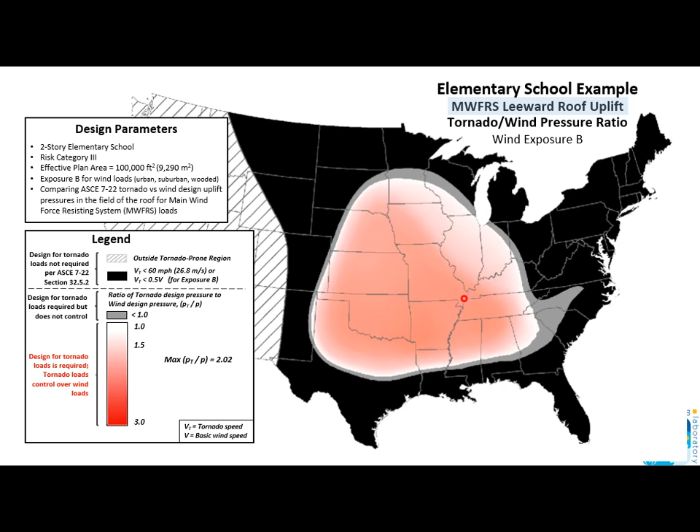So where are tornado loads likely to control? They're more likely to control if your building is located in the central or southeast U.S., except near the coast where wind speeds are dominated by hurricanes. Also risk category 4, because tornado speeds increase more quickly with higher return periods than straight line winds.

If you have an essential facility, we have a few different provisions that increase the loads for essential facilities. The bigger your effective plan area, the more likely tornado is to control.

You're more likely for tornado to control over wind if you're in exposure B, not because your tornado loads change, but your wind loads go down. So if your wind loads go down, then relatively tornado loads are more likely to control.

Because of this difference between wind speed increasing with height for straight line winds versus wind speeds decreasing with height for tornadoes, buildings with lower mean roof heights are more likely to have tornadoes control.

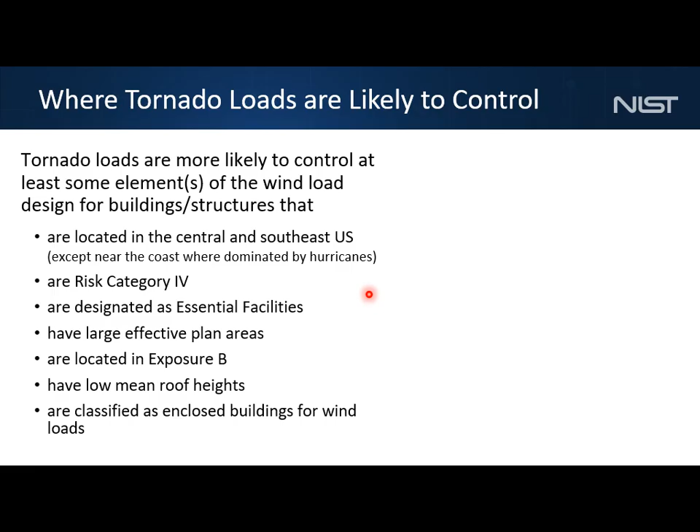And if you started out classified as an enclosed building to begin with, then you have to go to that plus 0.55 for the internal pressure in this location. So bottom line: where tornado loads control, design uplift pressures, especially on the roof, will increase.

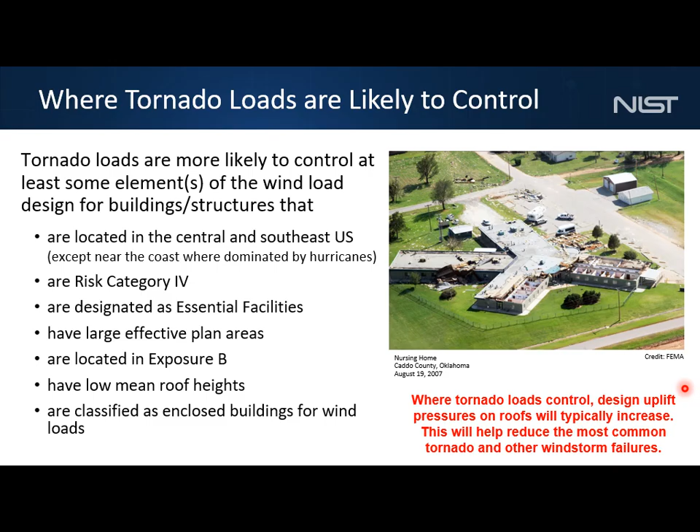Now the good news is that's also going to increase resistance to common failures from other windstorms. Where does our first failure start? Our failures typically start with roof cladding, roof covering, roof attachment, etc., in addition to window breakage and some lightweight siding failure.

So moving tornado loads into practice, we're successful in getting the tornado loads incorporated into the 2024 International Building Code, also into the NFPA 5000, which is hardly used much here in the US, but we've got that. It says design and construction of risk category 3 and 4 buildings and other structures located in the tornado-prone region, as shown here below, shall be in accordance with Chapter 32 of ASCE 7.

There's a few other bits and pieces here where they had some simplified wind provisions, we said you can't do tornado with that, etc. But basically, IBC says go see ASCE 7.

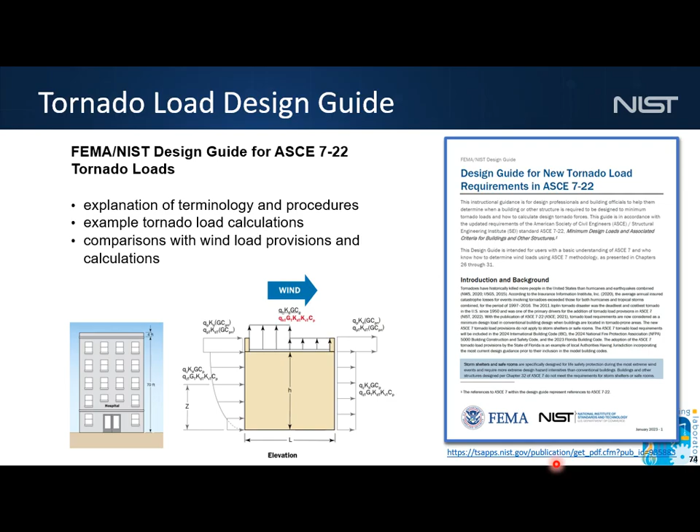This is a free download for you. I should have put a QR code, but if you just Google NIST FEMA Tornado Design Guide or something like that, it'll pull up a 32-page design guide that includes example calculations. It has more expansion of some of the topics I talked about today, including a typical hospital example. So I just encourage you to Google that — Google FEMA NIST Design Guide for tornadoes.

So let's wrap up here. What did we talk about today? Tornado load requirements and their impacts. Our risk category tornado load requirements apply to risk category 3 and 4 buildings in the tornado-prone region. That's our assembly occupancy, schools, nursing homes, fire, police, EMS.

The speeds that we're designing for in these maps are going to be about EF0 through EF2 speeds, like 60 to 138 or something is the range of maps in our standard. That depends on your location, risk category, and plan size. We're designing for the most common tornadoes, not the most intense, using the same reliability we use for straight line winds.

If you want to design for the most intense, put in a storm shelter. Go to ICC, Google ICC 500. You can get a basic version for free - you can't print or download it, but you can at least view it online.

Now, in some cases, particularly for larger facilities, our loads can increase significantly, sometimes greater than 100% - maybe we double the uplift on the roof. We did a study, working with our NIST Office of Applied Economics.

We worked with some designers and school designers in Dallas, a roofing expert, Tom Smith from Chicago, and went through and chased these through for an elementary school example and a high school example at 9 different cities. We didn't include St. Louis, but we had Kansas City, Memphis, etc. You can look at the details of those.

Even if your roof load increases a lot in some places, maybe it's a 0.1% increase in total construction cost at most in some cities in the center part of the country. Because even your roof cladding systems have these different classes, and you might go up 20-30% but it doesn't even change the roof class of material. You don't necessarily have to do it.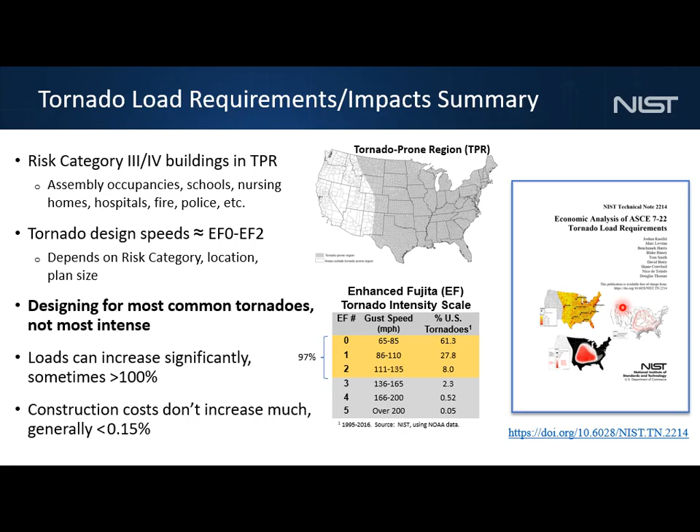What it typically did is maybe in some cases you need the next thicker roof deck size, maybe more connections from your clad and fasteners, maybe you need to beef up to the next bigger joist size, etc. But the changes are pretty modest overall to the overall structure.

So what comes next? Some current and future work we're doing at NIST - R&D to support improved tornado climatology and wind structure interaction, working to update the tornado load methodology we use in 7-22, support for local adoption of tornado-resistant codes. So I'm here today supporting you guys in understanding guidance for cost-effective strategies for tornado damage reduction, including risk category 2.

We've got a focus on warehouses. We have a report in collaboration with ASCE that will be published by ASCE soon about a FedEx warehouse collapse last year. And we'll be publishing our own report later this year studying 3 different warehouse failures.

Improved guidance for identification of best available tornado refuge areas and guidance for public tornado shelter strategies. Working a lot with my alma mater, Texas Tech University - they have the largest tornado simulator in the U.S. Let's play this video right here.

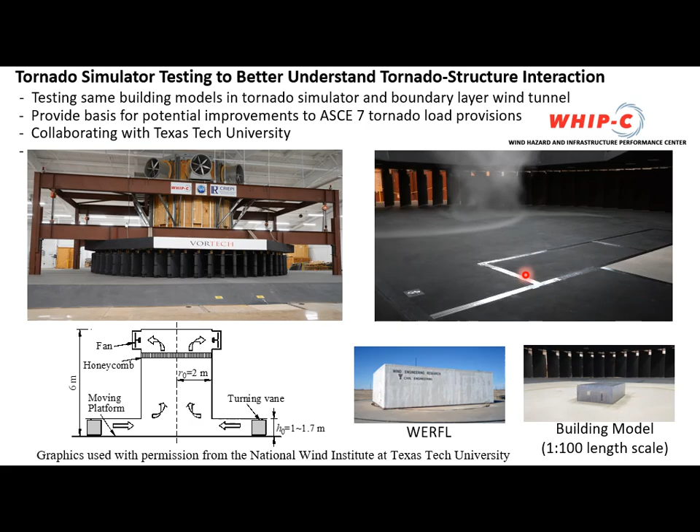So here's the tornado simulator - they have a moving ground plane. Here's a model of this building, which is actually a full-scale wind lab. We've done boundary layer tests on that same model, and we put that model in the tornado simulator. So we have a much better apples-to-apples comparison of what the tornado loads are in the building versus what the wind loads are. That will be bringing some exciting work.

And with that, I'll go ahead and wrap up and answer any questions. I threw a lot of information at you, kind of a whirlwind of information, but let's take some questions - yeah.

Yeah, and I will say as Marc Levitan, not as NIST, not as ASCE, this is my own friendly advice. I would just use the same rules, because other buildings will get replaced or whatever, and that'll be your best point in time to give the best performance. It's not like if it doubles or triples you add 5 or 10 miles per hour. If this little building I'm adding is only 10,000 square feet, but now I have to consider it as 1 million square feet, then you're talking 20 miles per hour maybe. But that's not peak. The costs are not that much, even where the pressures are going up, but it gets you better protection. So I would just suggest use the current definition.